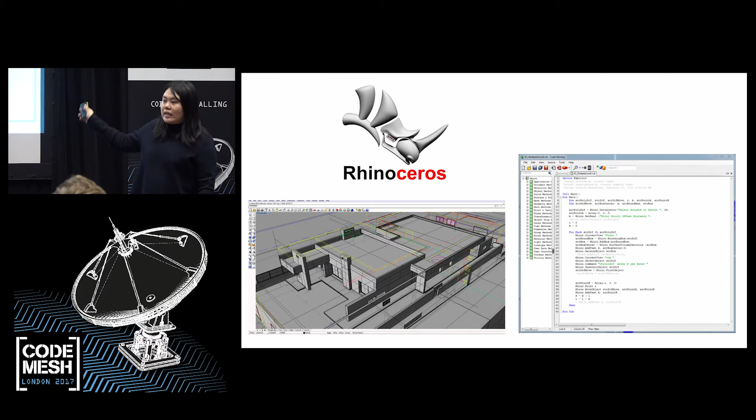I'm a software developer, but when you go into frameworks, you have all these dependencies that take ages. With this, you just dive straight into the logic, which is the best part of it. Everything is synchronous, so it's very logical too.

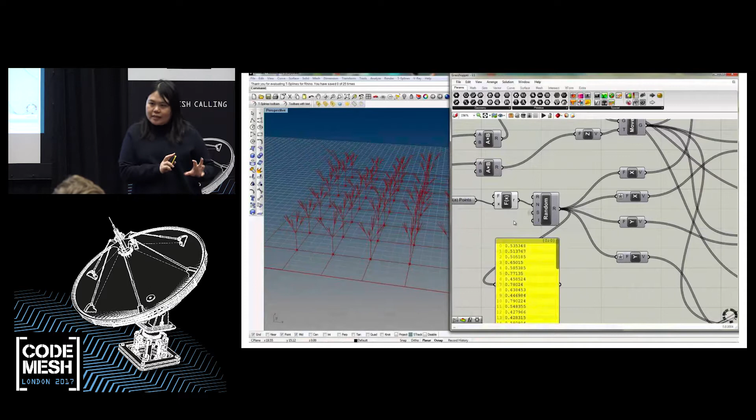A lot of architects are also trying to do this, but they don't have programming training and are very visual people. So there's something like visual programming, where instead of functions they have what they call 'batteries,' which are actually functions, and that's how you pass the data—through wires. It's very interesting, and you get all the data through the wires.

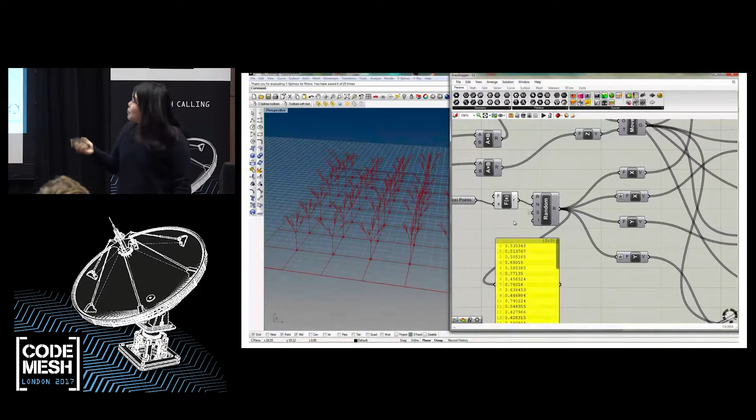I would not advocate anyone to do that, because you can have situations like this—and this is talking about a very simple script, maybe less than 100 lines of code—because you can't really iterate things within visual programming. If you want to do it, you still have to write script within the battery.

So I always say to architects, if you can drive a car, why would you ride a bike? I encourage anyone, even architects, to learn programming—it's essential for how we think nowadays in this world.

NURBS modeling—different software have different theory behind modeling. I won't go too much into the math because I don't know it, but everything within Rhino is formed by surfaces. Surfaces are formed by isocurves—you see all these curves? Isocurves are formed by points, and all these points are controlled by what we call control points. If you modify the control points, it modifies the surface. So the most fundamental concept is points, isocurves, surfaces—that's how everything is constructed in Rhino.

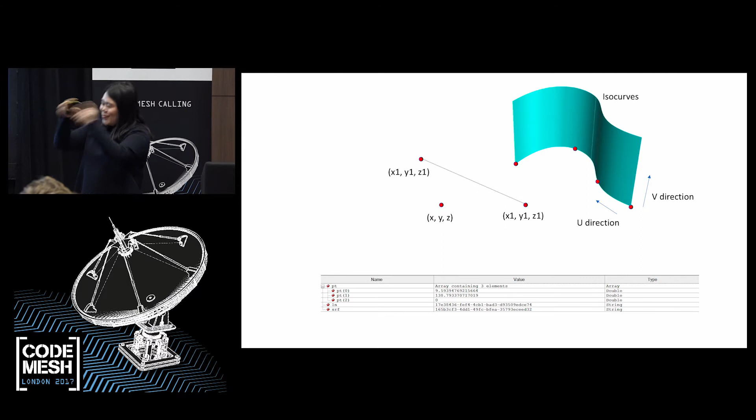A little bit about the data types within this 3D modeling library—the beauty of it is that it's actually very fun, because what you program, you actually see. It's not like you just program all this data; if you input a point, you construct a surface and you see a surface, and so on. You'll see what I mean later.

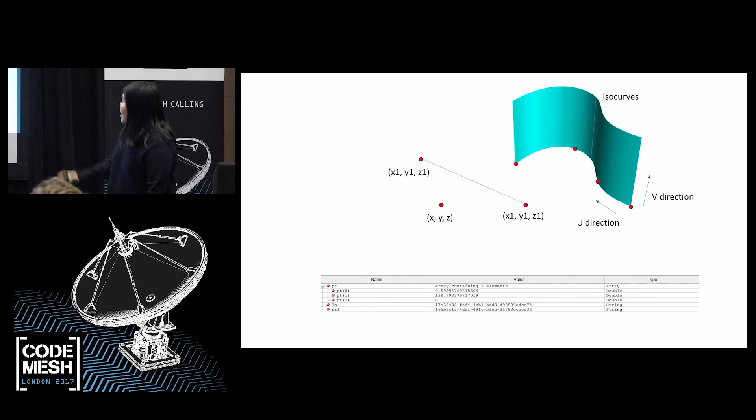So how would you represent a point, data-wise? It's the XYZ axis, represented as an array of 3 double data types. The second type is a line, represented as a string—but if you have a line input, you'll be able to extract the start point and the end point, and obtain the middle point, which gives you back an array of points.

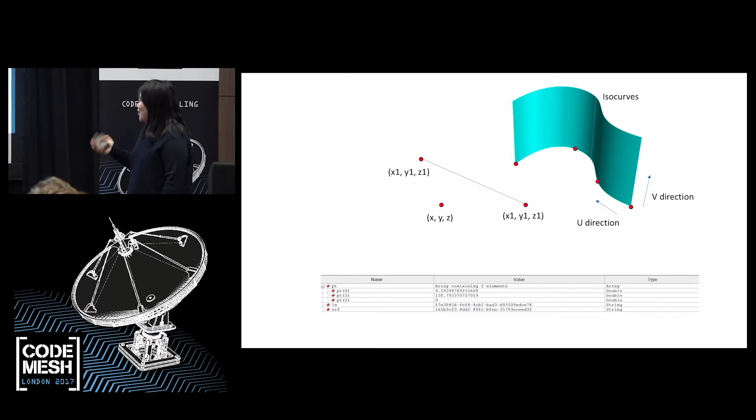Then a surface is also represented as a string in the Rhino software. With a surface string, you'll be able to obtain all the isocurves from that, and from the isocurves, you're able to obtain all the points from the surface. So you input a string, and you get all these wonderful things back. It still amazes me to this day.

A little bit about the common functions in the library—for example, extrude curve. What would you think extrude curve gives you? Well, if you have a curve and extrude it, it gives you a surface. That's how you construct surfaces. So you need to input a string, which is a curve, then extrude curve, and it will give you a surface, which is another string, as an output.

And for example, the curve surface intersection. So what do you think this class will give you? A curve, and then there is a surface, and it intersects, it will give you the intersection point. And if it's overlapping on the surface, then it will give you the period of overlapping, which is the start point and end point of the overlapping period. So this library will give you a two-dimensional array of things where you can obtain the event type, which is point or overlap, and then from the different array output, it will give you the intersection point and so on.

So from then on, you can go on to take the point to construct what you need to do further. It's pretty much like a visual puzzle.

And split curve, how you want to split a curve. So with curves, there's something with NURBS modeling. If you have a curve, A to B, there's a lot of points along the curve because you're not talking about a straight line, but a curve. In Rhino, the curve goes from 0 to 1. If you want an exact point on that curve, what they call is a curve parameter, so it's like a fraction. If you want 3 out of 64, that's a certain point and so on. It's unique to each curve.

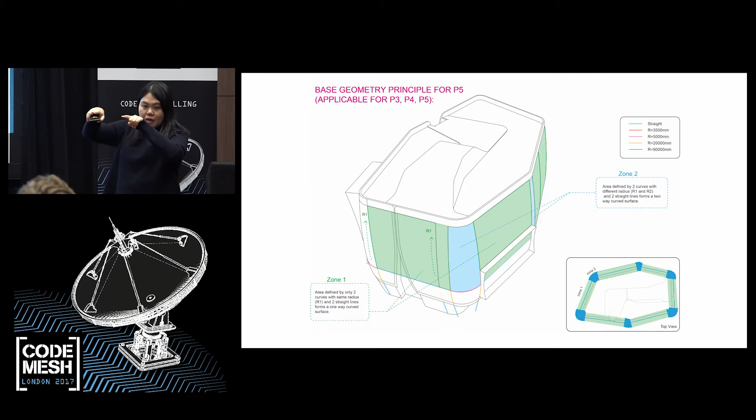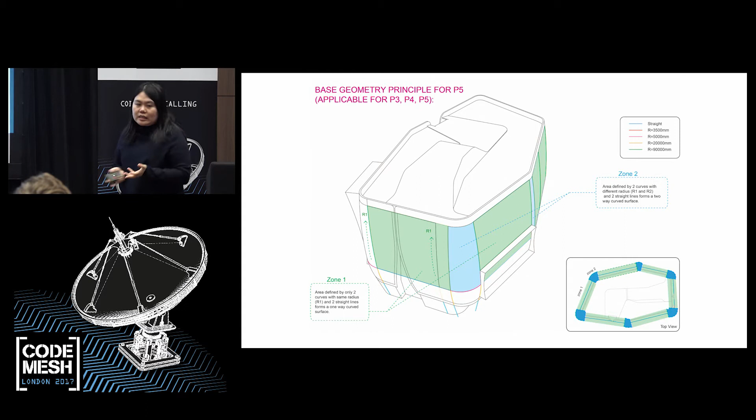So for that pattern, if you have 8 modules on the top, you have to have 8 modules in the middle, but you have to fit that with a curve of a different curvature, different length. But we try to optimize the amount of panels, so that becomes a very interesting design problem.

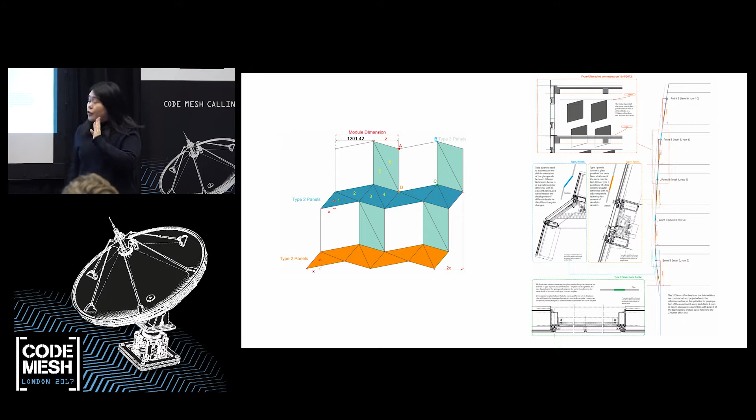You see all the triangular panes are aluminum panels, and those are the ones causing the problems, since they have different sizes and so on. So we identified two types: the yellow type is the one we align according to the same alignment as the glass, and the blue type is the one we shift to fit the global curvature. So we identified that facade system.

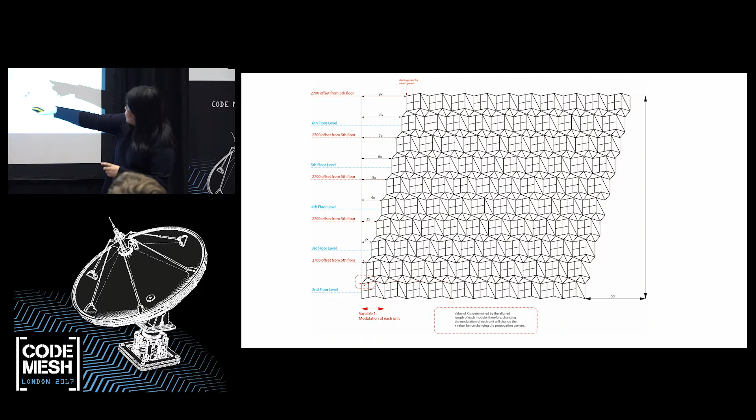This is how it will propagate in 2D. When you start from one end to the other end going up, in order to fit that puzzle, it will go slightly slanted. By the time it goes from the bottom row up to the top row, it would have shifted by 9 modules. So it's just identifying the relationship.

And within that, you have to fill in modules to fit with the corner piece. So with this design problem, we identified that the best way to tackle it is to go back and revisit the design process, to make a script to generate the panels from the ground up.

We control certain parameters to construct all these panels. So you have a flat surface, you have all the floor slabs—how would you go about putting that pattern into that surface? I decided to try to use, of course there's many ways to approach a problem.

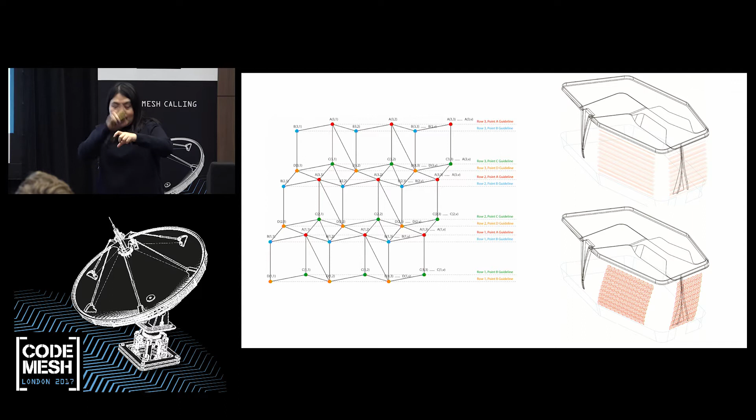Some people were suggesting to use vectors—you can try to get a surface to do a grid system, that kind of stuff. So I was just like, why don't we just do it simply?

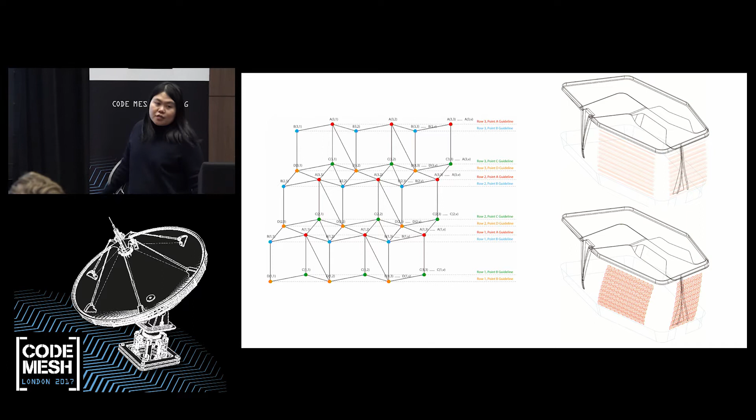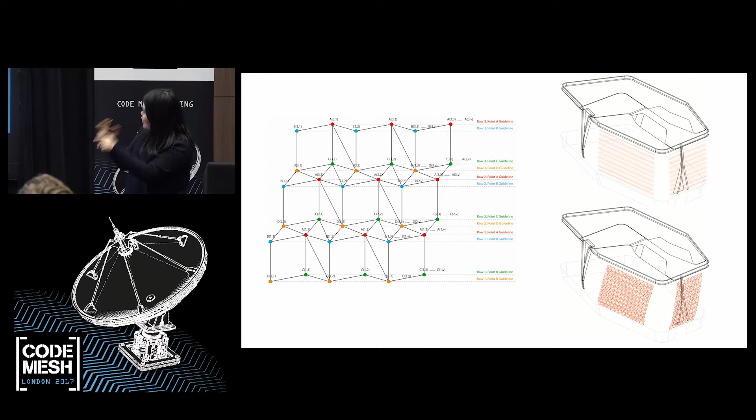I would just use guide rails, because with the surface you can extract the isocurves, and if you break down the component into certain key points, it's like as a kid connecting the dots in a coloring book to form shapes—pretty much the same idea. You extract all the essential guidelines, they're all straight lines, and it will refer to the level of the point of the module.

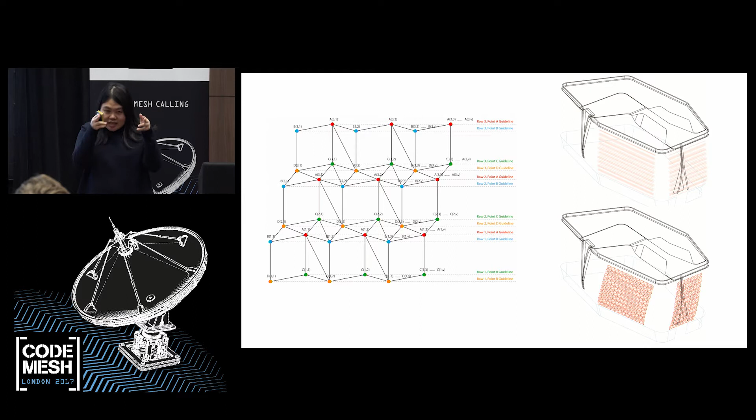From then on, you simply divide the curve according to your required length, and then you connect the dots to form the panel. The panel will be aligned according to the surface.

So this is the script for the strategy. First you produce all the guidelines, and all these guidelines are very simple—you can extract them from the Rhino library. You input the flow lines given to you by the architect, and you input the reference surface. Then the script goes through to extract all the guidelines—it's a function within the Rhinoscript library.

Once you have all the guidelines, you can start introducing different module sizes. If I want to test the entire module—glass and panel—maybe I want to try a 500mm width for the panel. Then along the entire length there will be 15 modules. If I want to try 14 or 13 modules, I can vary that and see the effect, because architects like to see how it looks differently.

Then from the points, you can construct the glass surfaces, and all those will be aligned according to the curved surface. So we've solved zone 1. But zone 2, how do you solve that? Because on plan, everything is the same, so you can just use these strict guidelines and simply divide it by the length, right?

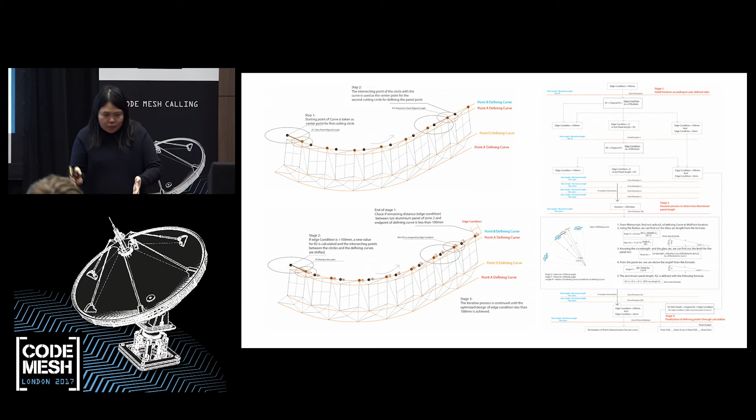The script will say, okay, now we need to shift the aluminum panel from 300 mm to 301 mm - we'll do it by increments of a millimeter. What we'll do is, if you have 8 modules, it will first determine whether you can fit 8 modules. If you can't, it tells you to go back and change another number. But if you can fit 8 modules with an edge condition of 180 mm, you take the 180 mm, divide by 8, and start again, shifting the points by 180 divided by 8 mm, and go on.

But the thing is, it would not exactly propagate the edge condition because this is a curve - the aligned distance is different. So you keep iterating that until it meets the tolerance level, which is, let's say, 100 mm.

But the world is not ideal. There are cases where, let's say if your panel is 324mm, so you increase by 1, so 325. Maybe before the edge condition was, let's say, 22mm, and then you need to go back and re-optimize it. But if you increase it by 1mm, then maybe it will be negative, eating into the next zone 1 panel. So there might be situations where you cannot obtain a configuration that meets the perfect edge condition, and that's when we brutally cap it at 200 runs.

If it couldn't find a solution, I would brutally set it to use the arc calculation. So you cannot accept that all the same length. We'll just assign some panels according to a different length and call it a day.

So this is pretty much the layout of how the iteration of obtaining these points works, and this is an important class within the script. After you've set up the points, generating the next layer of points is much more straightforward.

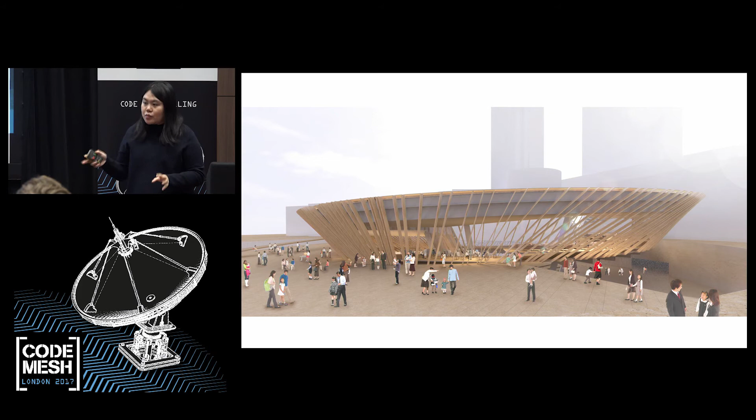This is a different project I did, this time as an architect. The good thing with being an architect is that before, we were given a lot of restrictions on how the module is designed, given by the architect. By the way, the architect of the previous project is very smart — I think that system is one of the best component-based design systems I've ever seen, and it gives you ground to have all these fun mathematical things to play with. That's what I'd call a good system.

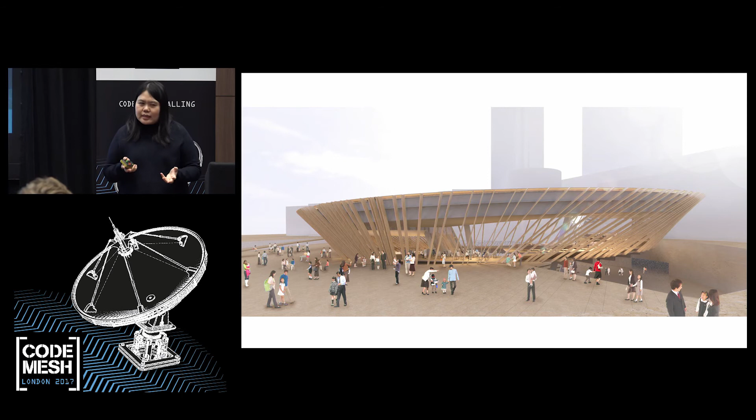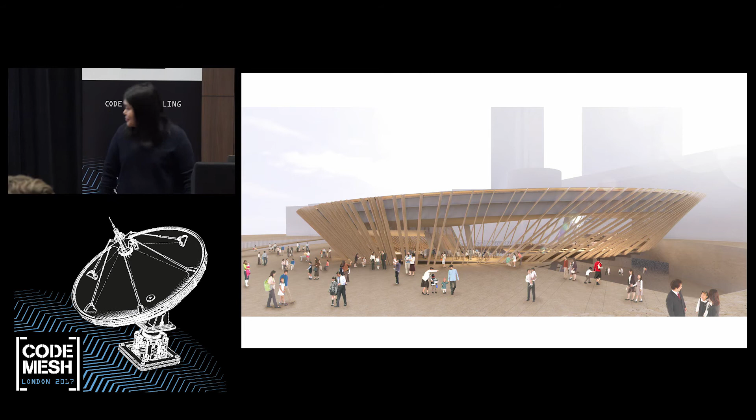With this one, I worked directly with the architect who designed this. This is a museum in China. Unfortunately, the project was kind of on hold, but maybe one day you'll see it. Kengo Kuma, once he got this project, said he wanted to make a museum gallery with a spiraling surface — that was the only condition he gave, and also cost.

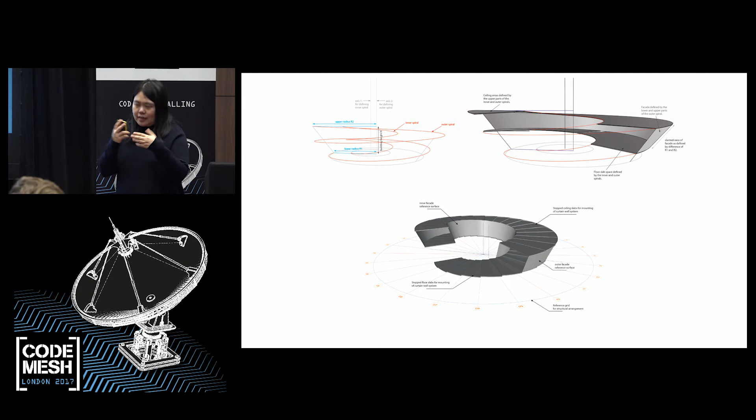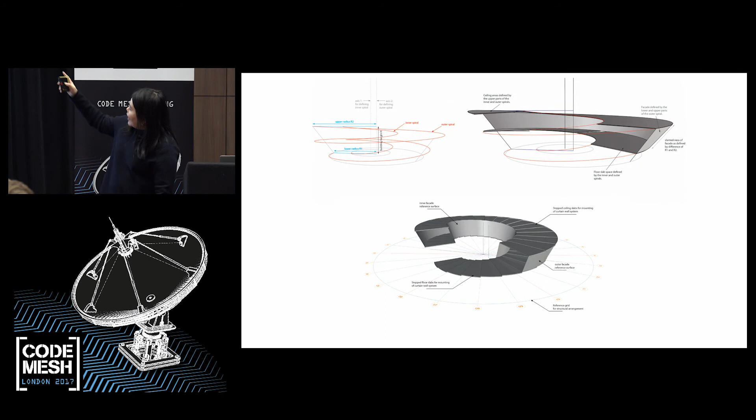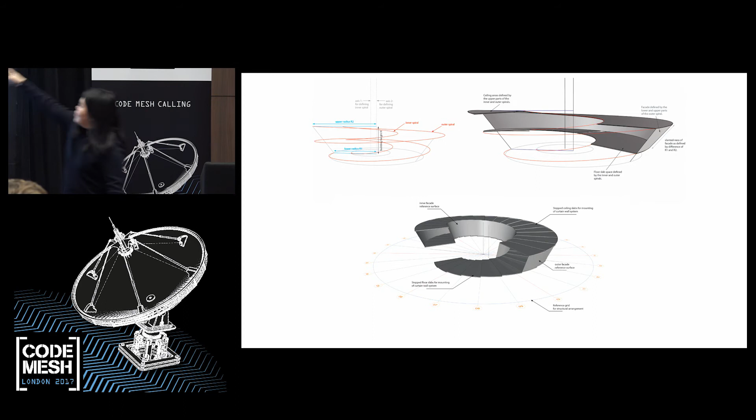He wanted to panelize it with straight panels, what we call flat glass panels, not doubly curved panels. But this spiral surface is a doubly curved surface. So here I first identify how you do this spiral surface. You basically have an upper spiral, a lower spiral, and an inner spiral to form it, and then you see these are the slabs, the gallery space in between.

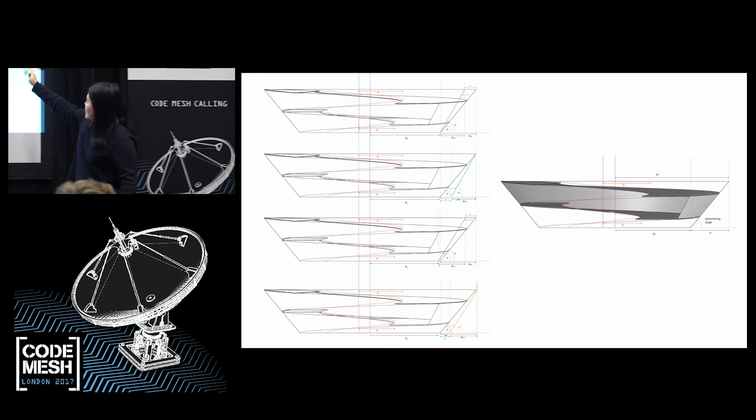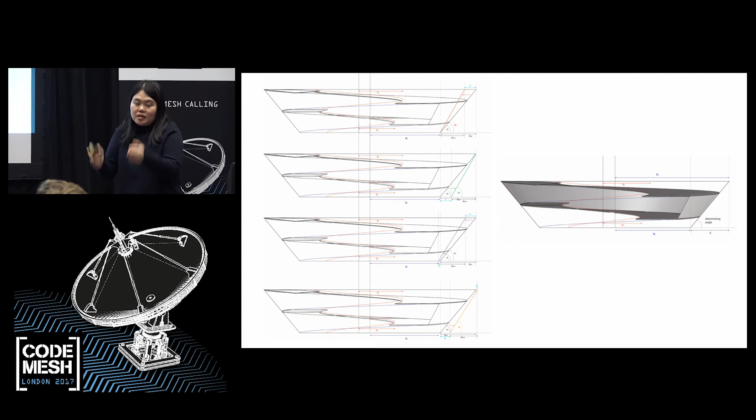This is more like an architectural thing, but here we are trying to optimize and find out the relationship, how you can achieve the required surface area with a spiraling surface. So the angle of the inner and outer spiral curve could affect what we call GFA, the area of the geometry, but there's no coding involved in this.

So I have this surface identified. Then I start to think about how would you panelize that surface? Flat glass panels, that's the only condition. So of course you go into what's the best way to try to cut it first. That's what I start doodling in my notebook.

And then I have identified 2 ways to cut or divide the surface. One way is, along the spiral, you divide the aligned width of the glass, using the same way I mentioned in the last exercise, where you construct a circle or a sphere to obtain the intersection point to get the aligned distance.

And the second way is you have a cutting plane, and then you take the center point, rotate it by the same angle to obtain the divisions. But I decided the first way is better because the center of rotation method, it's actually not much you can control because it's such a big scale, and the angle that you rotate, if you rotate a little bit, you're already making divisions beyond the fabrication limit. So that's why I chose the first method.

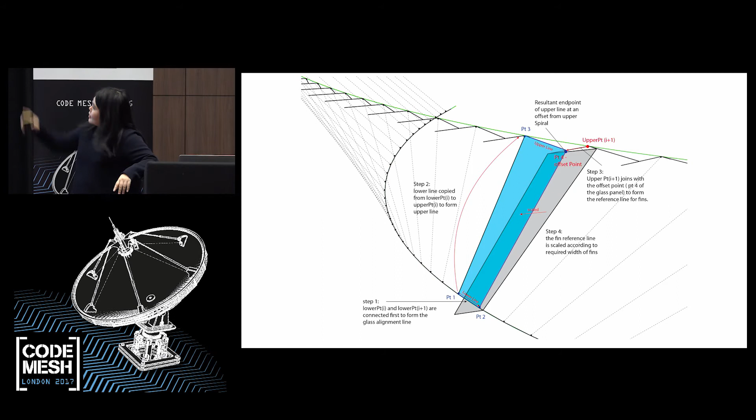So in order to make it flat, you have to take point 1 and point 2, take that line and copy it to point 3. But if you do that, it will create this kind of offset from the upper spiral. That's the beauty of why, as an architect, you are able to design the system. That kind of drives me to think, okay, if you have an offset point, why don't I just put a wooden glass fin to conceal it?

And then in the end, if you were to copy that, it would become like a turbine shape or a fan shape thing, and it kind of became that design narrative. So for example, Kengo Kuma-san goes on to say, oh, this gallery is trying to represent the Chinese culture with the Chinese fan. But it's basically just to solve a design problem. So this forms the basic system of the facade.

And from then on, I can start to construct a script to generate this. Of course, this is just very plain if you just copy it and have this turbine across, so you try to introduce small, interesting design features. So I also went back to the notebook and started to find out what parameters I can vary to make it more interesting.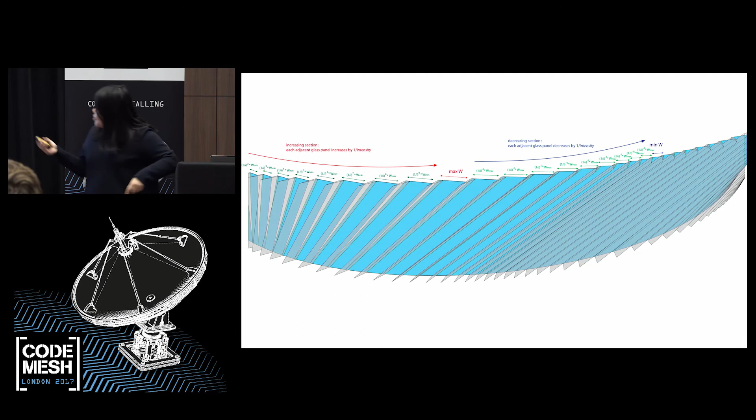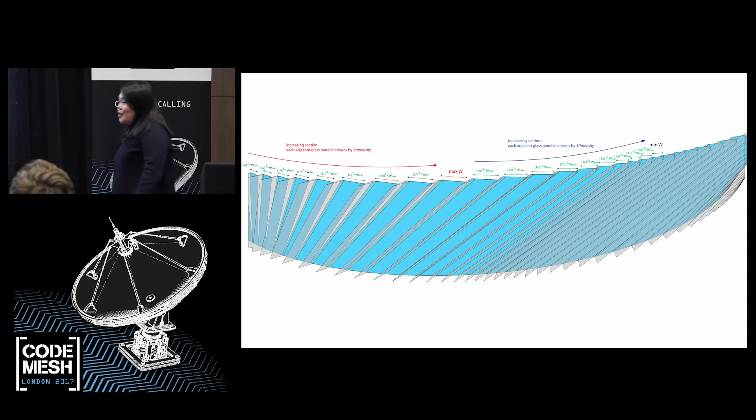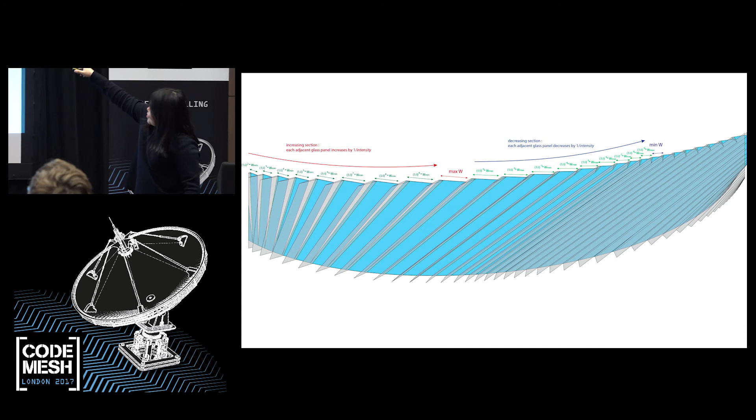If you recall, here I have chosen method 1. The variable I can input is actually the width, top width and bottom width, so I can use that to control how my geometry would work. I was thinking it would be quite cool if, walking along the spiral, the distances go from a wider glass to a tighter glass and back to a wider glass again - from a tighter width to a maximum width and back to minimum width, as a design parameter. It would be quite fun.

So okay, this time I'm going deeper into the code. It's a relatively simpler code. Within Visual Basic, you have to design the user inputs - you can't generate something from nothing, so you still need to input something. I've identified a variable called intensity. Intensity basically controls how drastic this change would be. And then there's what I call the detector.

Basically, it detects which zone you're in, increasing zone or decreasing zone and so on. And you have to define what's the smallest width, the biggest width, and then you have to input all the spirals to generate all the points.

And then you define the center point of this cutting sphere to obtain the intersection point. And then you also have to define the width of, let's say, the first panel within the increasing section. What would the width be? And then the next panel, and so on.

So the width is governed by the intensity. And then you also save the data for outputting to Excel. And then you would construct the first sphere.

We use the sphere, not a circle, because the curve is not a plane, it's spiraling up, so you need a sphere in order to obtain the intersection point. You start with the lower spiral, obtain the next point, then you need to obtain the relative point on the upper spiral, and construct a bigger sphere to obtain that intersection point. Then you construct the glass surface, make the panels and fins, and output the data.

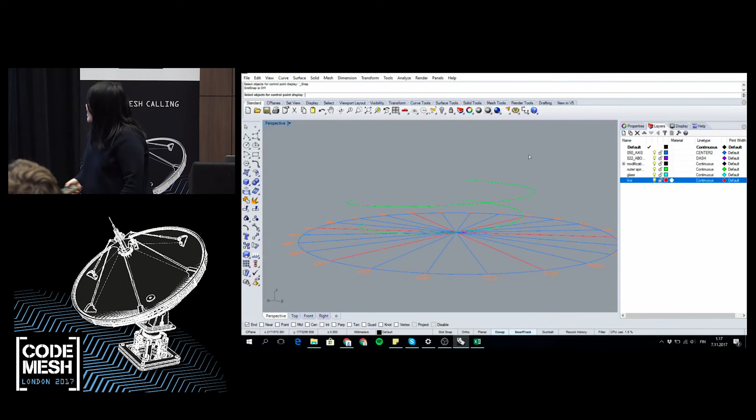Okay, enough talking, let's see how the script will run in action. So first, when you want to run the scripts, you need to call the edit script at the script editor, and then you start running the script. So you need to input all the variables that we have defined.

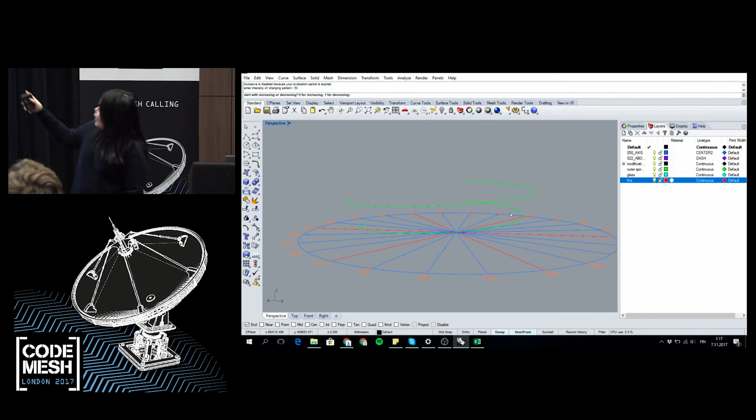So I set the intensity to be 50. And then you have to enter all the minimum glass width, the maximum, so you can kind of control it in terms of fabrication-wise. And then you also control how that slanted length would be. It's 15 meters, so yeah, it's a crazy big piece of glass.

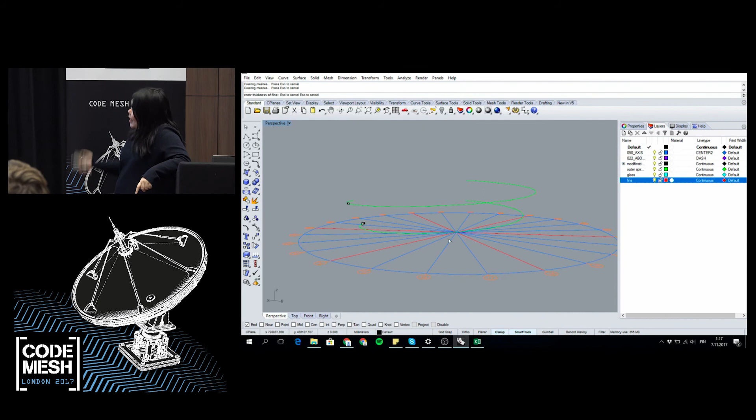Maybe that's why they put the project on hold, I don't know. So then the script will start constructing all these spheres to obtain all the intersection points. It's really fun, right? Because what you program, you can actually see in action. It's actually very soothing after you programmed, and then you just watch the ball.

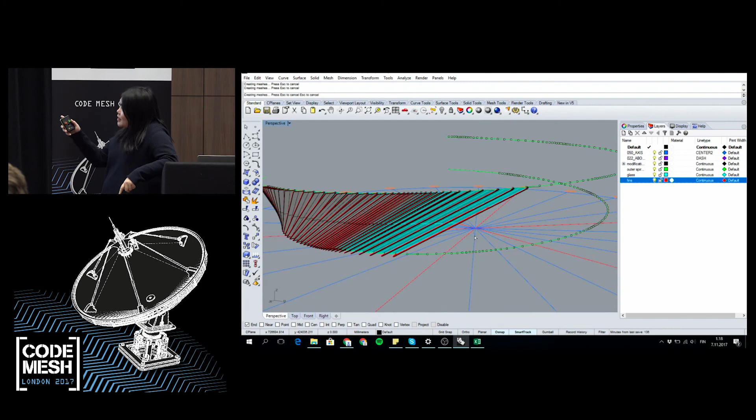And then we'll start constructing the glass panels. Of course, because the viewport needs to reconstruct the geometry, so it's slower. But if you minimize this, it doesn't need to reconstruct it in front of you, then this process is talking about seconds, no, milliseconds.

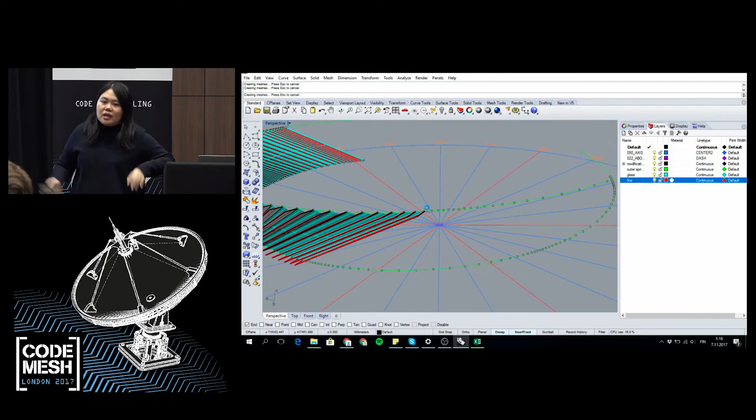So you get this within 1 second, yeah. But there's nothing better than seeing your code come in action.

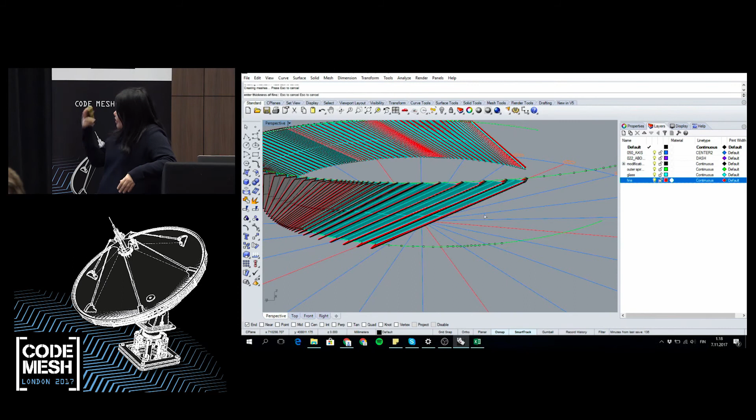So you see all those offset points being concealed by the aluminum fin, the decorative fin, and as you reach the end of the spiraling surface, it will actually output all the data. It will call Excel directly and output all your data according to basically all the data that's defined within the script.

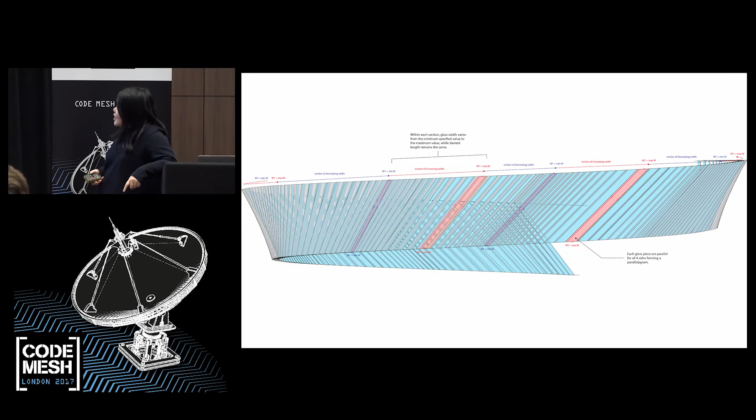Yeah, so this is it. And this is kind of the final result that you will get, gradual zones where you go to an increasing zone, decreasing zone, increasing zone, and so on.

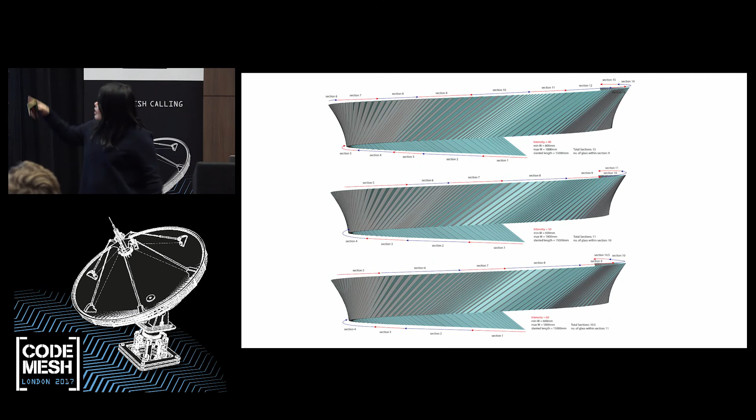And since the intensity is a variable that you can change within the script, the effect is not that different, but you can test different intensity as to how it will look in general in the form, and you can also analyze the data to see which configuration will allow you to produce the best cost.

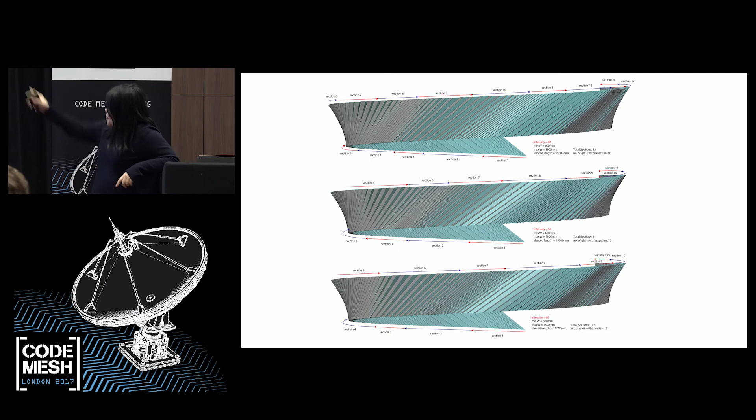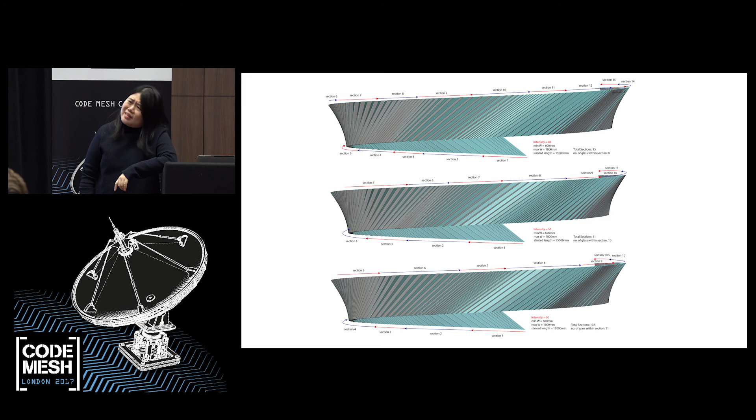And then, of course, we're talking about 15-meter long glass. The biggest glass that's ever in this world is 18 meters, and that's the Apple Store, I think it was the Apple Store in Hong Kong. And of course our client is not Apple, so they don't have that budget.

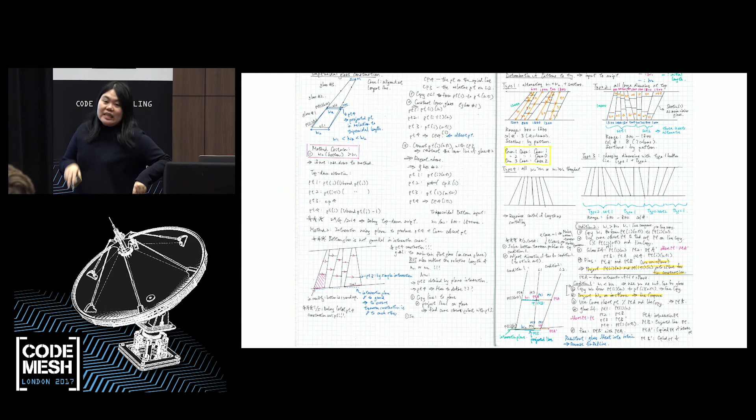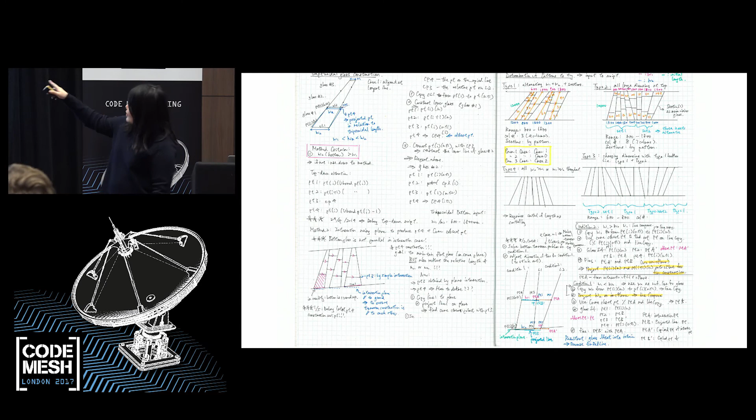So we'll have to further think about breaking the panel down, and what comes as an obstruction to the design actually turns out to be something that you can play with. I go back to my notebook and start thinking about what are the best placements of what we call this breakpoint for the glass.

This is something we call transom. So what's the best way of how we put the transom? Because we have a script as a basis, I can just write a new class to construct all these different places where you can put the transom, and all these things can be generated just by putting a different variable, and within the script it runs within seconds.

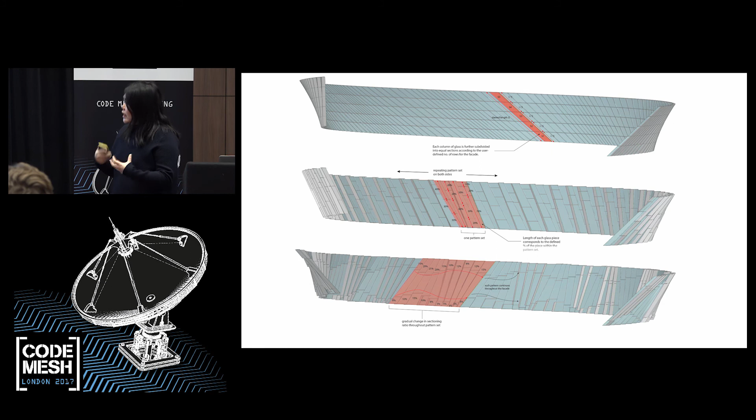Imagine modeling this for an architect, because every piece of glass you have to measure and model according to the exact dimension. This would take an architect weeks, days, if not months, to generate different effects. This really affects even the human mind—we cannot imagine things to be a certain way. You only know when you generate the script. So this is actually a very new and interesting design tool.

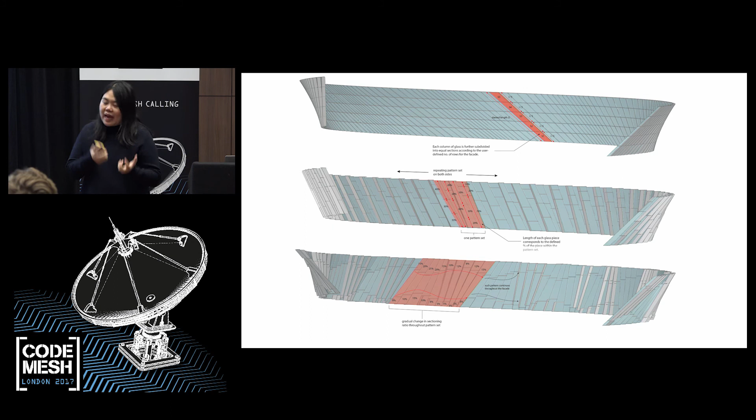It's in the hands of the power of the developer, so we are very powerful, not just within the development world. This is a bit more on the architectural design part. Before, when we copy the point, we would copy it to the point of the lower spiral, but we can copy it according to the top line instead, and it will produce a different atmosphere within the building. We can identify different cases, tweak a little bit in the script, and generate different effects.

This is again to showcase the different effects of it. By the way, my presentation is very visual because before I was presenting to architects, so that's why you kind of have to diagram everything to show visually how it works.

This is a very powerful library, but there are also a lot of limitations to it, because technically they designed this library for hobbyists. They have no idea of states and so on within the program.

So by states, let's say if I run the script until I've generated all the points and I have a bug in the code or there's unclean geometry—let's say after it outputs all the points, it has 133 points instead of 132 generated. From then on, your script breaks there, and you have to go in, check why it breaks, and run the script from scratch again. Within the black box of Rhino, it loses all the data once you terminate the script.

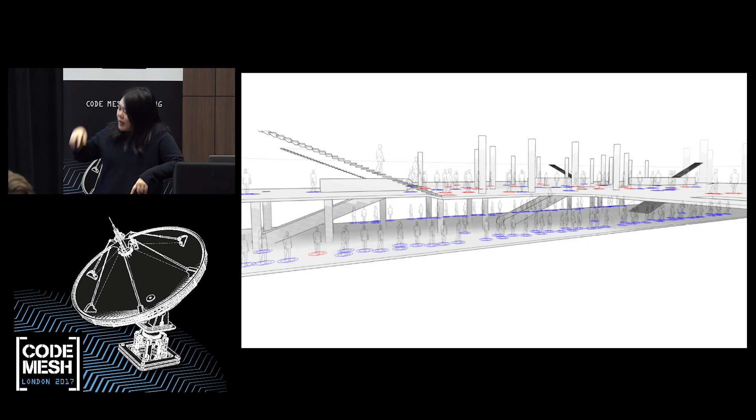Okay, so I'm not an architect now. How I see it can be applied to a lot of applications outside of architecture is something I've always envisioned since being a master's student. Architecture is not just visual—it can really affect your daily operations in a building.

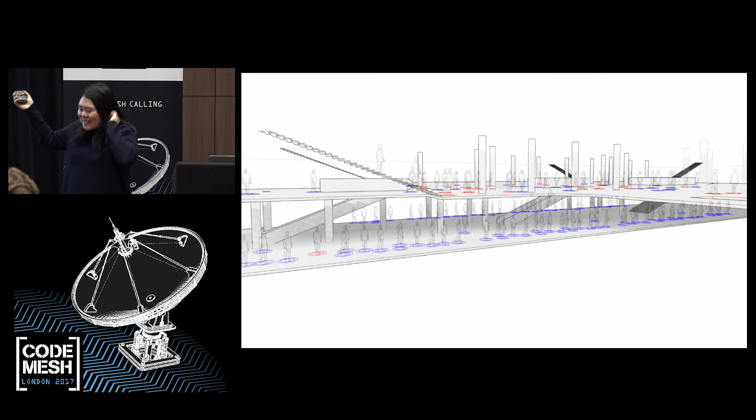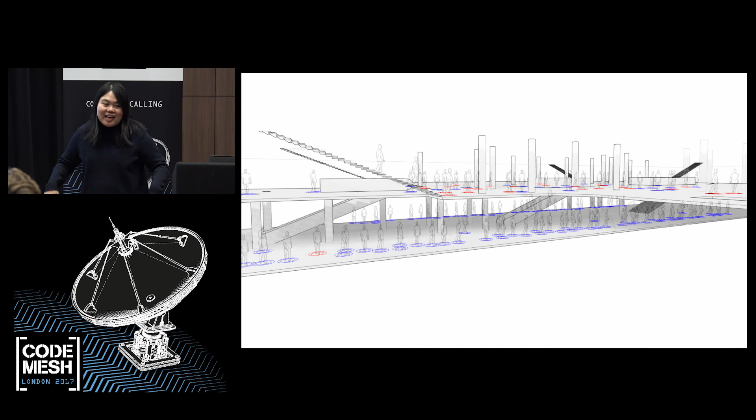My master's thesis proposed a solution to solve congested underground stations. What if the main problem causing congestion is pretty much your ticket gates? What if we can eliminate the ticket gates? We can, because we have augmented reality. If we combine it with sensors, we can detect whether people have paid or not once they pass the pay zone. This is one of the reasons why I'm going back to the development world.

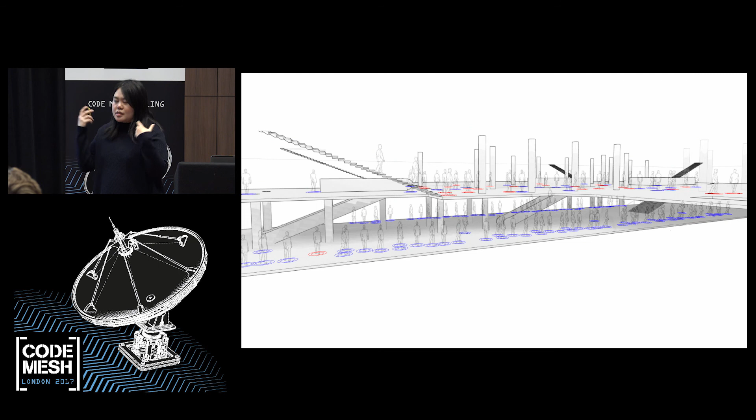This is one thing—we can use this kind of mindset of doing 3D programming in software development. These are just some dream scenarios that I did before, proposed as an architect. So yeah, this is it.